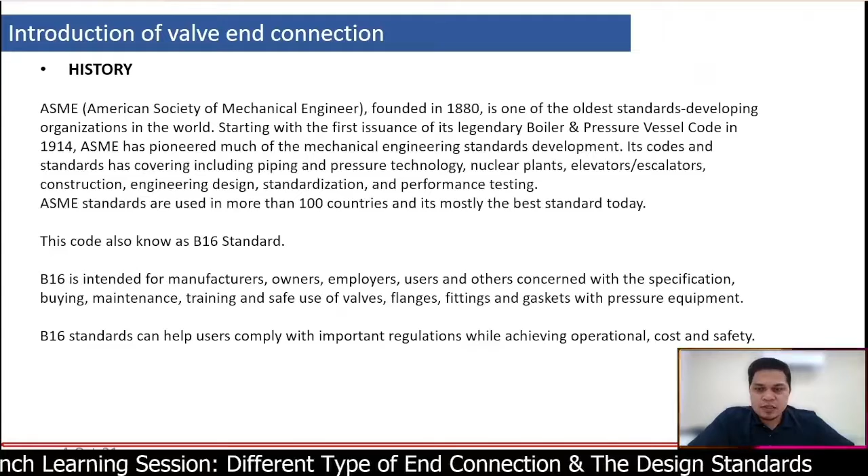So we move to the second slide. Introduction of valve end connection for B16 standard. As I mentioned just now, there's a lot of B16 standards. So for valve, maybe we can focus on 5 ASME standards only, as you can see in our slide. The first one is ASME B16.10.

This refers to face-to-face and end-to-end dimension of valve. For example, you have a valve that needs replacement on site, so you may refer to B16.10 for the end-to-end dimension. If you want to order the valve, the purchase order, we need to know what is the length of the valve. For the second one is ASME B16.34.

B16.34 refers to pressure and temperature rating standard for testing. For example, for 150 pound, you need to refer to B16.34 and see what is the shell pressure, soft seat pressure, and sometimes back seat, to see what is the value of the pressure to test the valve.

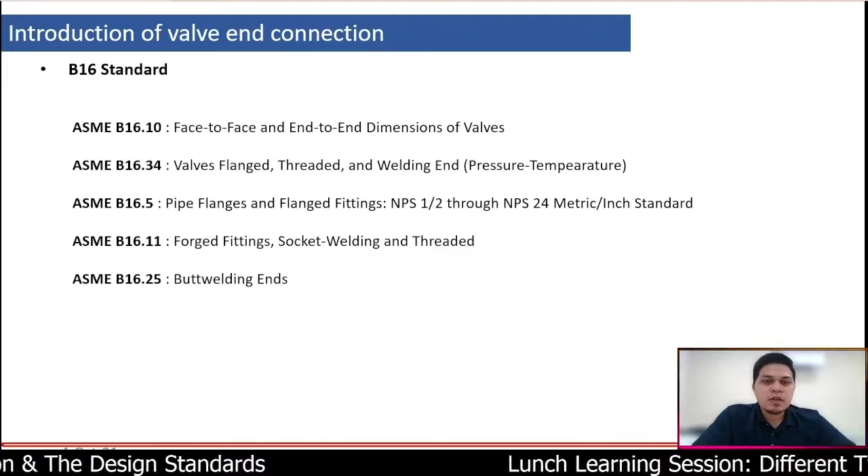And then ASME B16.5 is flange and pipe flange fitting from half inch up to 24 inch. So this one you may refer to for the flange, what type of flange you need to refer.

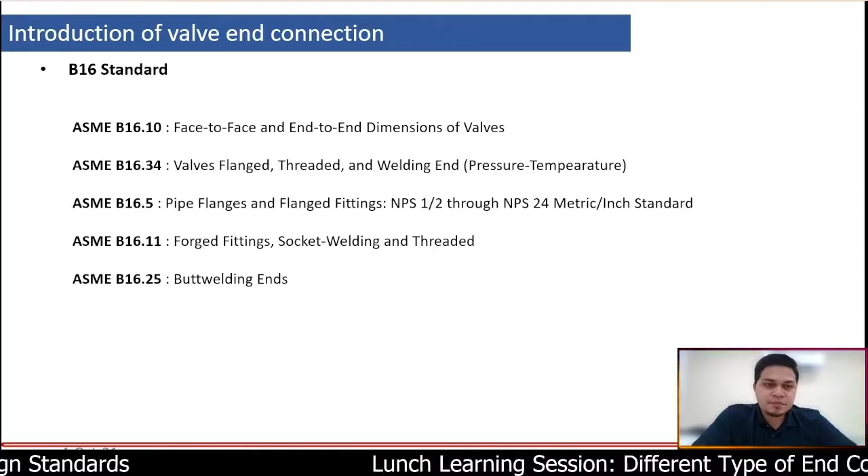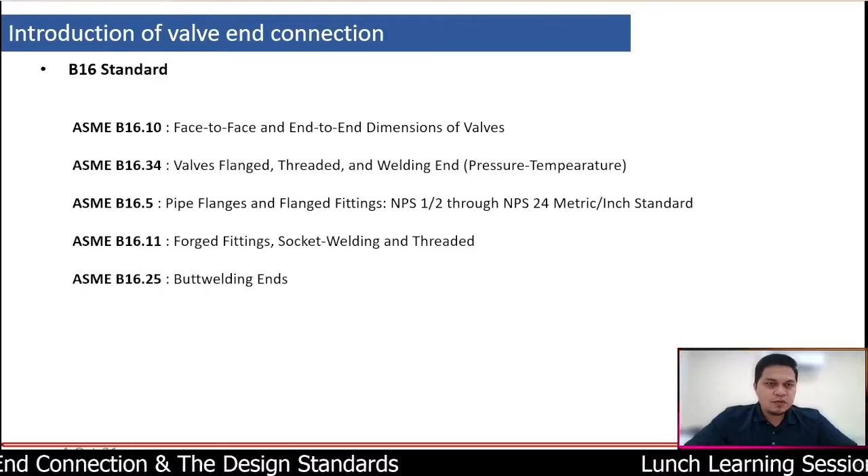And then ASME B16.11 is most likely for socket weld and threaded. And lastly, ASME B16.25 is for butt weld. So these are 5 basic B16 standards you may refer to if you need to know the specification further.

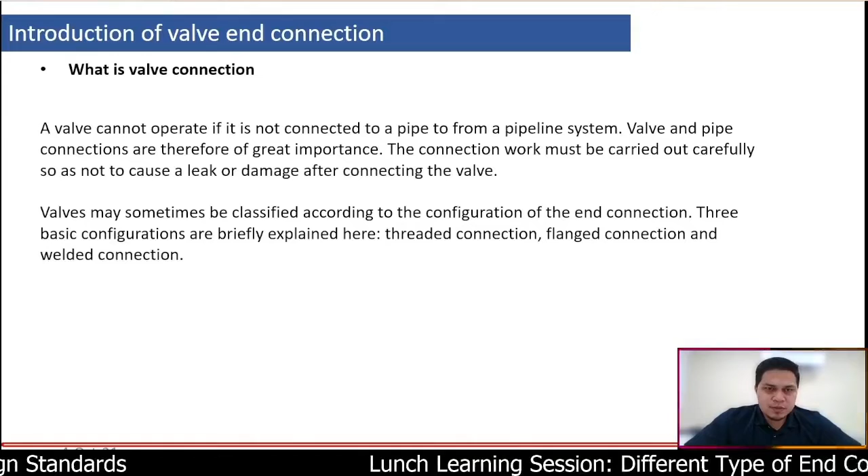So what is a valve connection? A valve cannot operate if it's not connected to a pipe to form a pipeline system. Valve and pipe connections are therefore of great importance. The connection work must be carried out carefully so as not to cause a leak or damage after connecting the valve. Valves may sometimes be classified according to the configuration of the end connection.

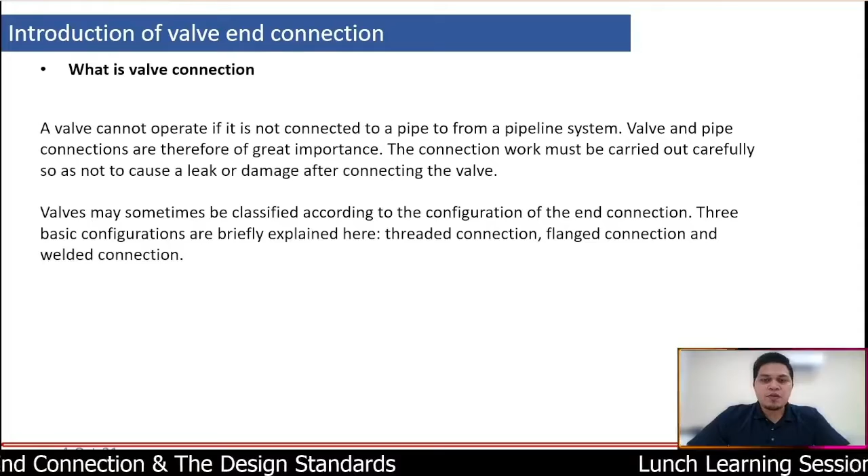We have three basic configurations widely used in oil and gas, which is the threaded, the flange, and also the welded. So what is the most common valve connection used in oil and gas?

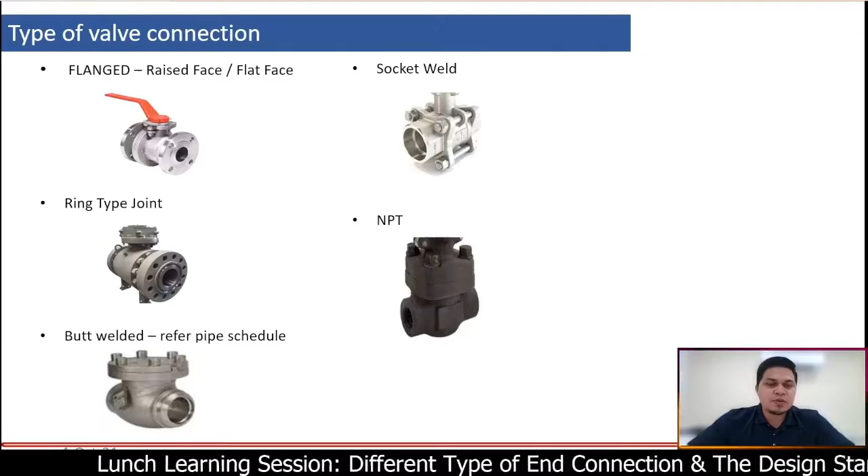The most common used is first the flange. We have raised face, flat face, and ring type joint, as you can see in the presentation slide. The third one is butt weld, fourth is socket weld, and the last, mostly used, is NPT threaded.

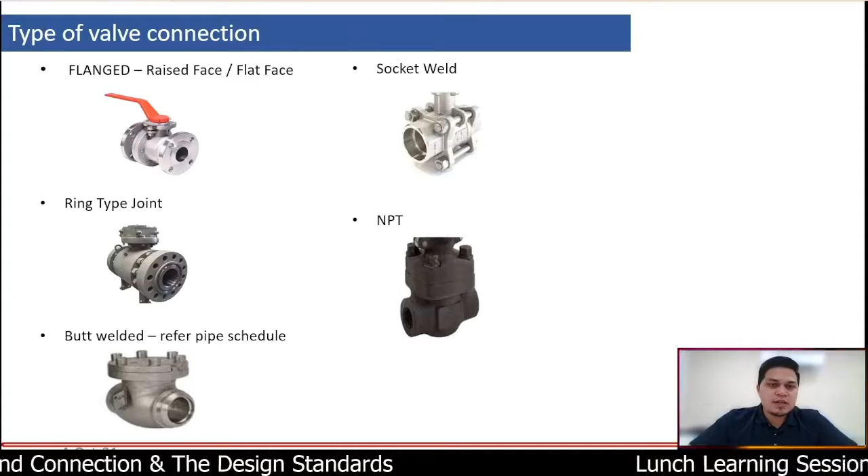So let's look at every valve connection of each type. First, I would like to talk about the flange, which is raised face and flat face. This is the most common type of end connection because it's easy for installation and removal.

You need to connect from valve to the end flange only with the stud bolt. There are two types of flange, which is the raised face and flat face. The difference between raised face and flat face is normally flat face is commonly used for low pressure, like 150, and mostly to be safe, we can choose raised face for low pressure and medium pressure, between 150 pound up to 900 pound.

How to install the flange is easy. You need to choose the same type of flange that meets the valve end connection, and you may put the gasket between the flange and the valve end. So you just tighten up with the stud bolt and nut.

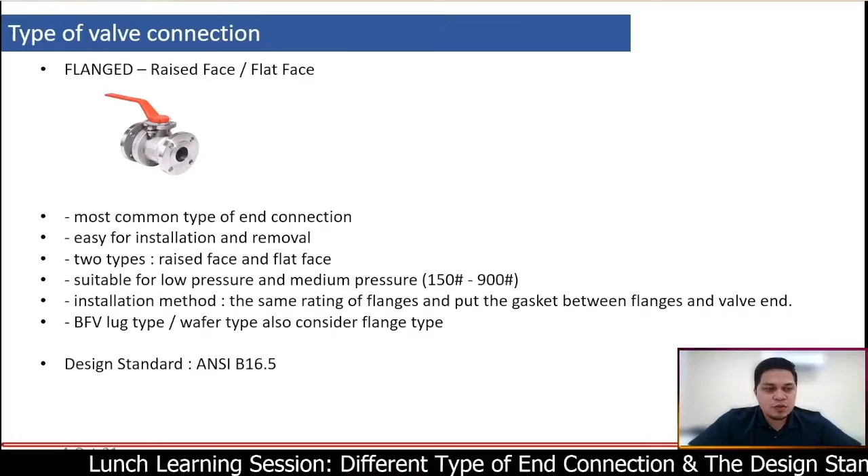Also for extra information, normally butterfly valve that you may see for the lug type or wafer type is also considered a flange type. So the design you need to follow is ANSI B16.5 for flange.

Another type of flange is a ring type joint, also known as RTJ. It's a type of flange suitable for high pressure applications. So if you need high pressure application but also need a flange end connection, you may propose to client with RTJ.

For installation method, it seems like a flange face, but you need a special ring that can be used as a gasket. So if you have a high pressure application, you may propose the RTJ type. It's in the same group of flange, so we may follow design standard ANSI B16.5.

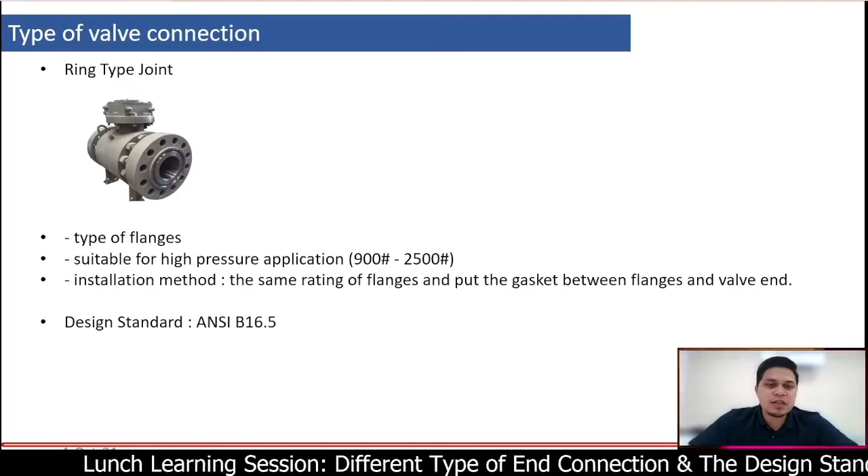Alright, so the third one is a butt weld. It's suitable for high pressure, a permanent installation, and normally we can see it in small size but high pressure. Installation method: the pipe rating and pipe schedule should be the same, and the connection is directly attached to the pipe.

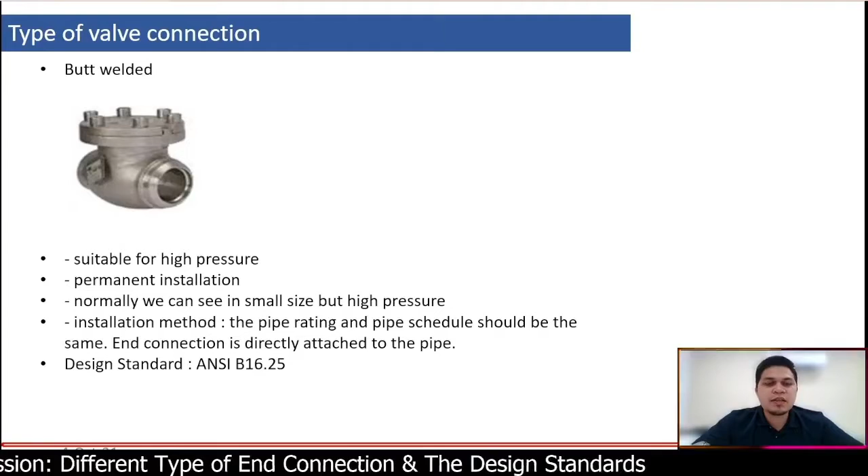So why can we say it's suitable for high pressure? Because the valve end and the pipe are welded together, so it's more tough. But for butt weld, you need to consider the schedule of the pipe. Let's say the pipe schedule is 40, you cannot choose a valve with schedule 160 because it's not the same. So it's another consideration for pipe schedule.

Alright, socket weld is also suitable for high pressure. It's a permanent installation, same as welded, and normally we see it in small size but high pressure. The installation method: the pipe will slot into the socket and the joint will be welded. The design standard we need to follow for socket weld is ANSI B16.11.

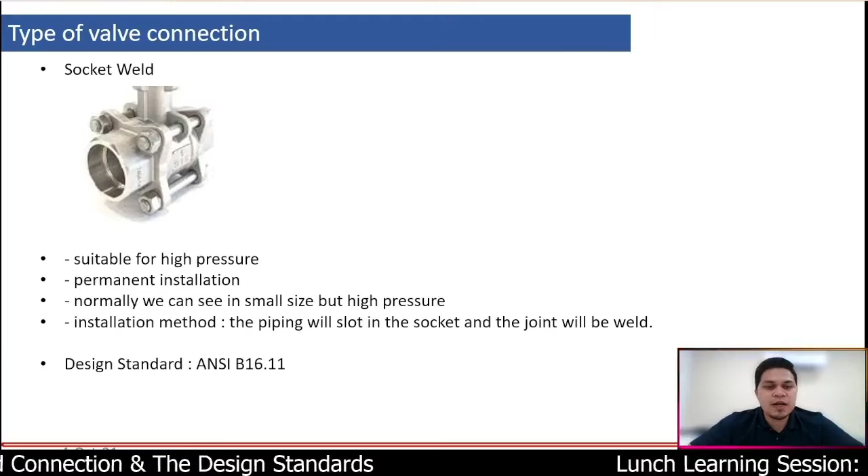So every valve, every end connection, they have their own standard that we need to follow.

So the last type of valve connection is what we call NPT. It's suitable for low and medium pressure because it's not tightened by stud bolt and welding. They're just threaded to connect the pipe and the valve. Normally the valve has a typical female connection, as you can see in the slide presentation.

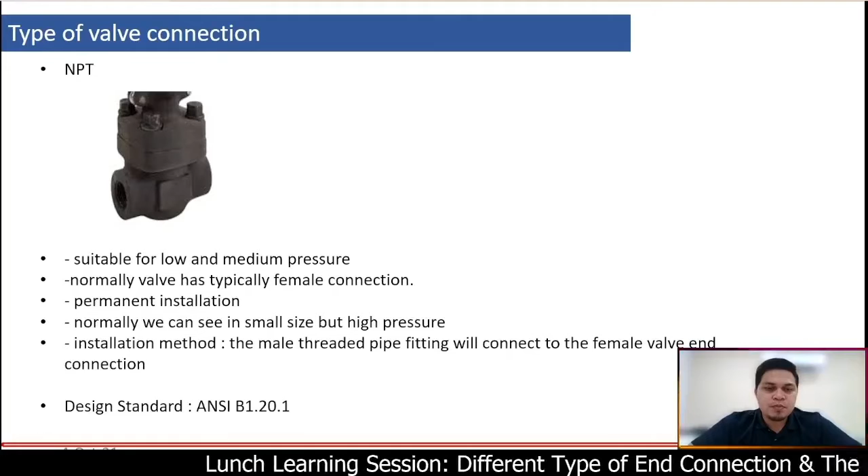And this is not a permanent installation. Sorry for my mistake - normally we see it in small size but high pressure also. The installation method: the male threaded piping fitting will connect to the female valve connection. This end connection is not widely used commonly. The design standard is ANSI B1.20.1, so you may refer to this standard for NPT connection.

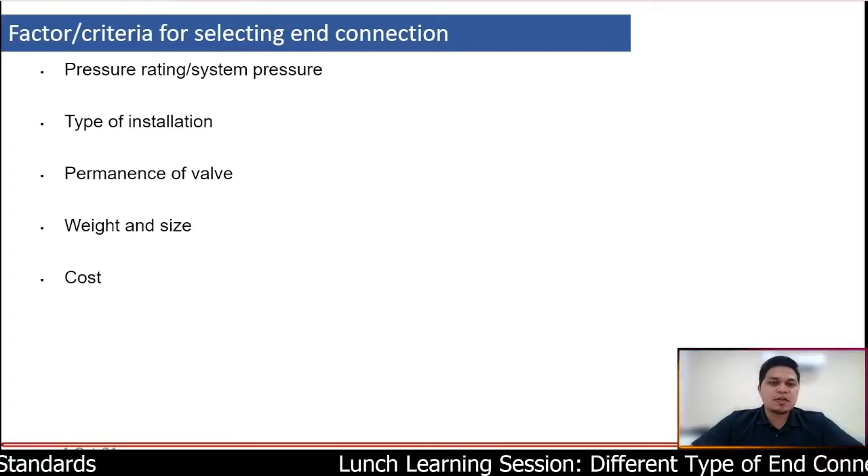There are more factors or criteria for selecting end connection: the first is pressure rating or system pressure, type of installation - whether it's permanent - the weight, the size, and also the cost.

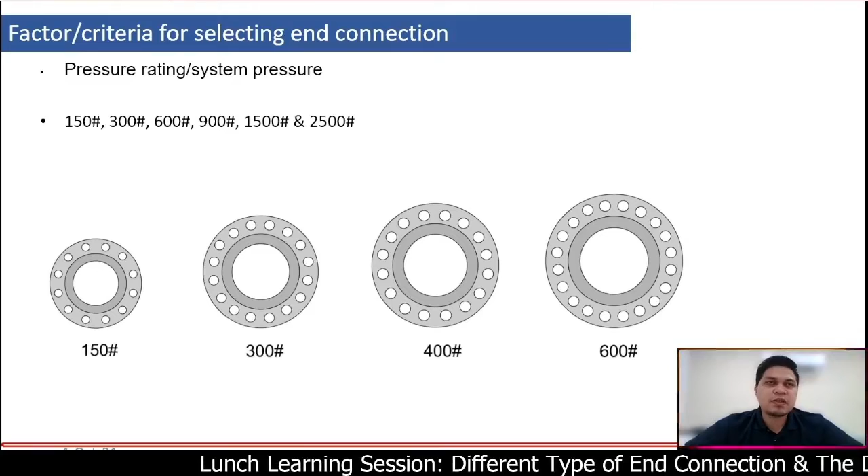So you can see the pressure rating here. This is a 6-inch valve - you can see even though they have the same size, with a different pressure rating the flange or end connection will not be the same. Like you see is 150, they have 12 bolts, and for 300 it has around 18, and so on. So for every valve you need to consider the size, the rating, and other specifications, because every valve, every size, has different thickness, bolt size, and end connection.

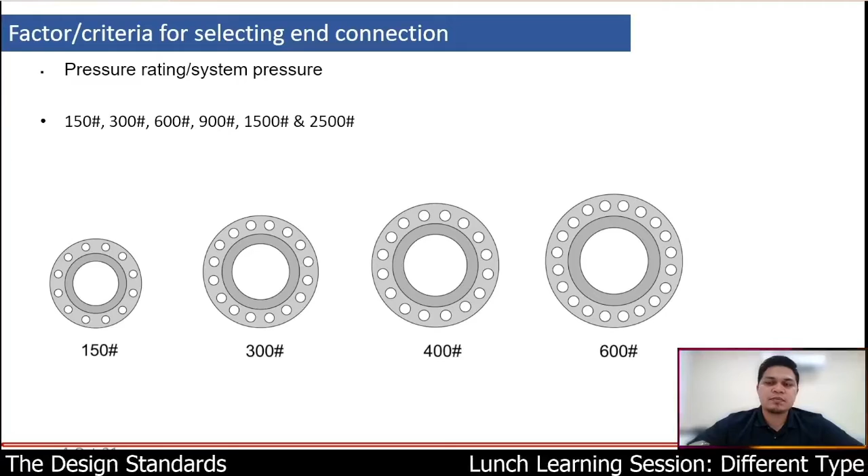Alright, so let's see some comments. Is there anything I need to know?

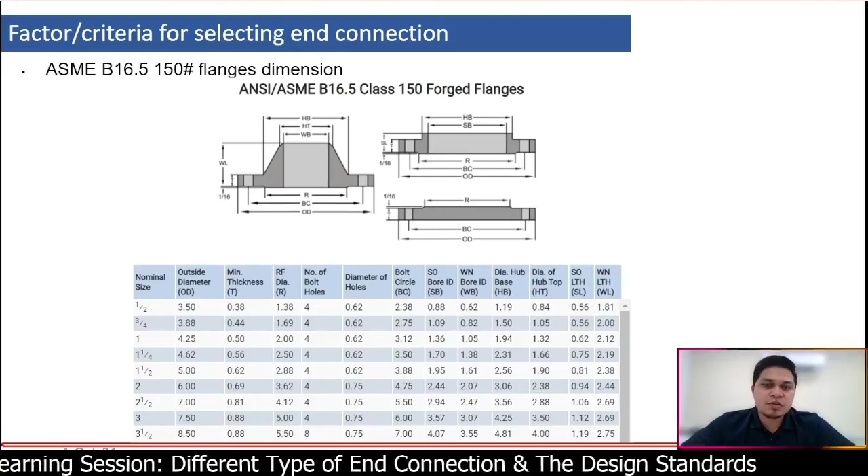Does NPT require welding? No, NPT does not need welding because NPT just tightens up the valve and the pipe only with the thread. So it's not advisable to go for high pressure - for low pressure, maybe we can use NPT. Like normally for general industry, we use NPT for connection. It's just cheaper and also easier to install.

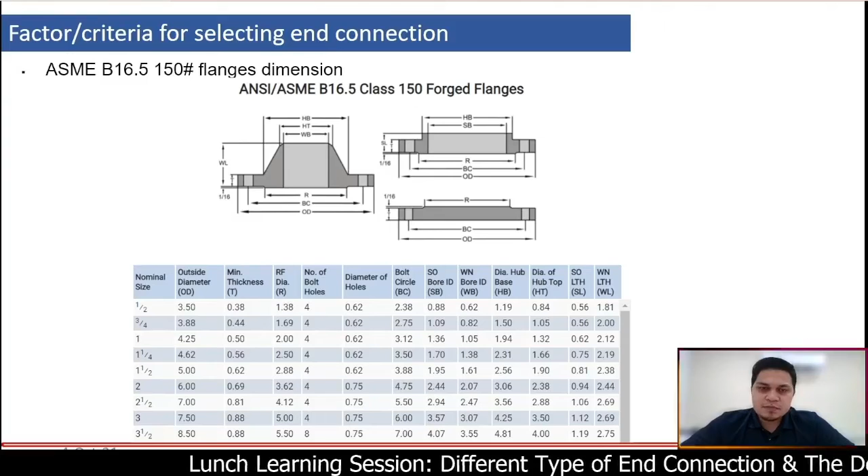Alright, so I think there's no question from the comment section.

So that's all for my presentation today for technical clarification on the end connection.